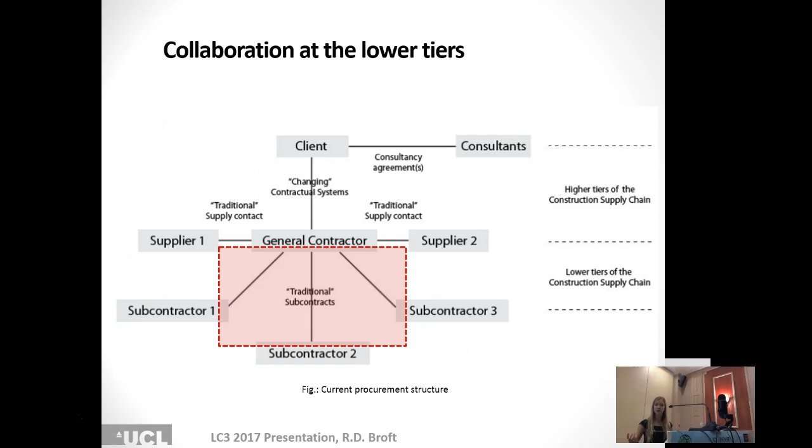You get the answer often, well, it's because of the characteristics of construction. It's because of the fact that there's converging logistics to a common and fixed point. It's because it's temporary and non-repetitive. There's always a change in the parties on site. You have multiple and concurrent projects at the same time to manage. It's engineered to order, and you have two types of processes, batch processes and job processes. And these characteristics are seen as peculiarities. They're seen as something that prevents flow as efficient as in manufacturing.

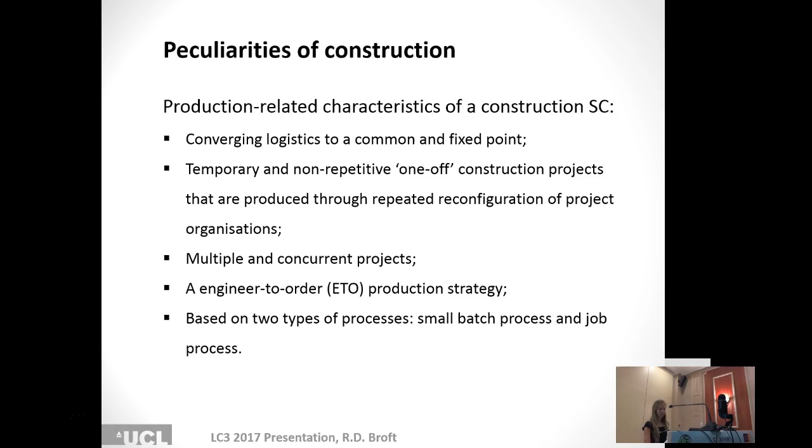And previous research that I've done with Stephen Pryke, UCL, says actually that the main contractor could use the central position. He could take the leading role in implementing supply chain management. But we showed that if he wants to do that, he needs to develop his internal activities and become more mature. He needs to help suppliers to become more mature, and he needs to facilitate value creation on-site and off-site.

This paper shows the journey of one step. Just one step to become supply chain mature. So what could you do as a main contractor to become and to help? It describes the advantages and effects of implementing value stream thinking and flow to construction supply chain. And it shows what is the effect on collaboration and what is the effect on the activities. That step is like a production system design. How could you organize your project? What could you do, etc.

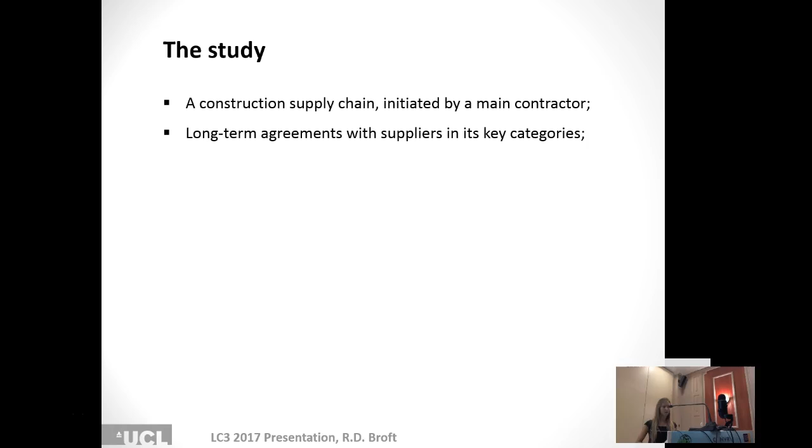It's an experiment. So what do we have? We have a study that involves a construction supply chain initiated by a main contractor. So a main contractor says, okay, I'm going to build long-term agreements with suppliers in key categories. So he has one collaboration with every category, etc. The supply chain is based in the Netherlands. He has one focus: he focuses on one value stream and designs it for that value stream. In this case, basiswonen, which is Dutch for housing.

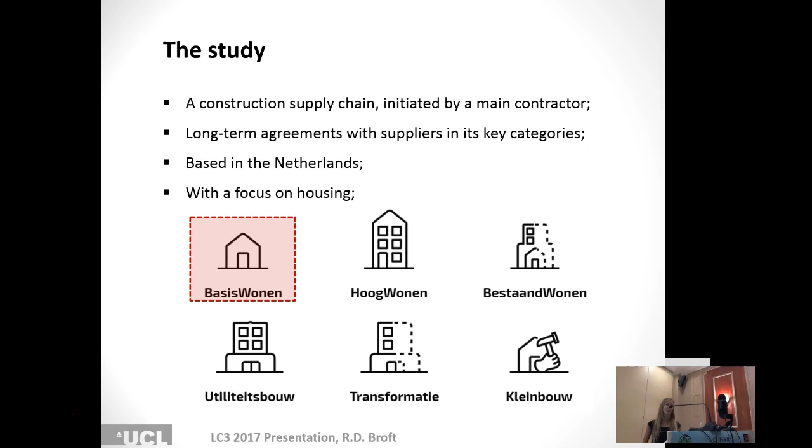We chose a project of 40 houses. So one project, 40 houses, and we conducted an experiment. And within this project, therefore, we have two cases. One case done as an experiment, and one case as a traditional. And the case involves more houses. So one part has been done as the experiment, and one part has been done the traditional way.

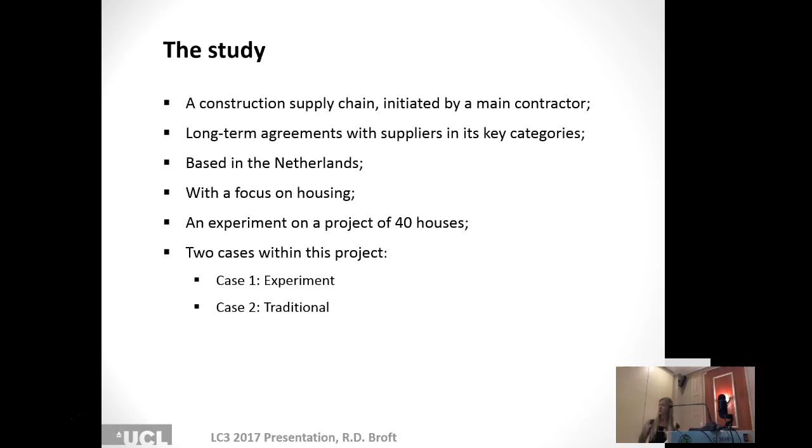This is just for you an illustration of the object. So this is the product they had to execute. So you have to imagine that while doing the experiment and while doing the traditional building, there were semi-structured interviews on all levels. So the director levels, project leader levels, and the people actually on site. There were also multi-moment analysis, so you have to imagine that every minute of the execution there has been measured

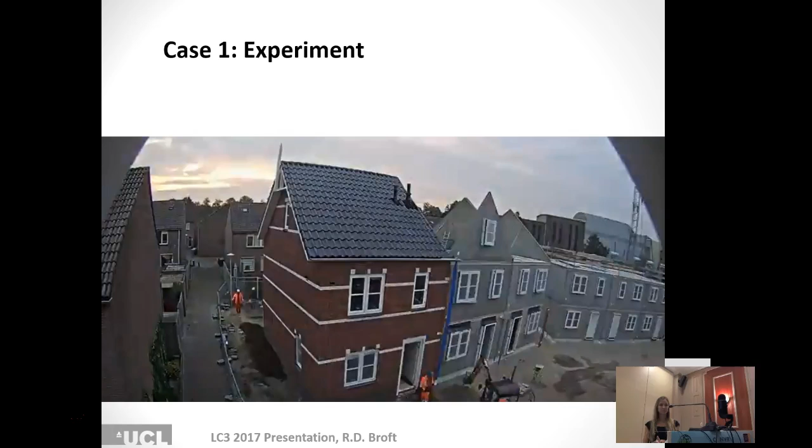what has been happening. And if you put that into a table, and this is just a summary, but this gives an overview of what has happened in case 1 and what has happened in case 2. And this is just general for a discipline, but we have this information also on every activity that has been done by a contractor or by a subcontractor. So for example, if you see production of foundations, then it's not only foundations as a total, but also all the sub-activities have this information.

What is the lead time and what is the value waste ratio? How many employees were involved? What time did they start? What time did they finish, etc. In this table you can see, and that's the most important information, that when you do it with case 1 as an experiment, it's continuous flow. So no single moment that the product is waiting. At the moment that one activity finishes, the next one continues. And that means that the product is finished in 20 days.

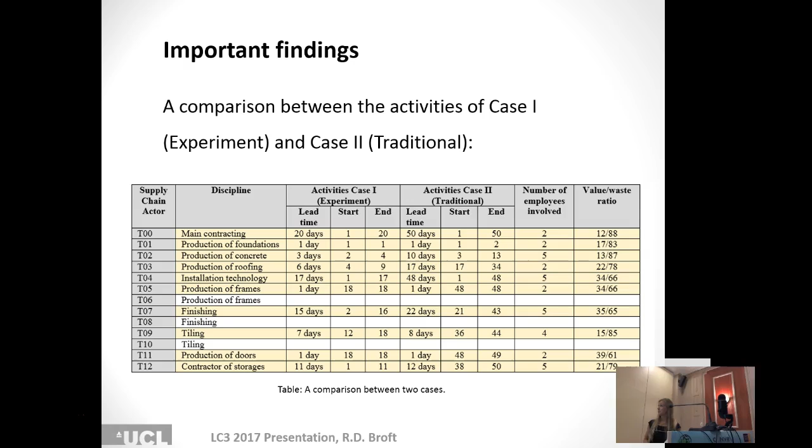The other case, traditional, has the batch thinking in it. If you execute it that way, it's 50 days. So that's the biggest difference in lead time of delivery of one project. Value waste ratios are written then. Value adding activities within the activities of the supply chain members remain the same. So there's not more value added in one case over the other case. Within the activities, the ratio is the same, but of course there's a lot more waste in the traditional case because the product is waiting in between the activities of the different parties.

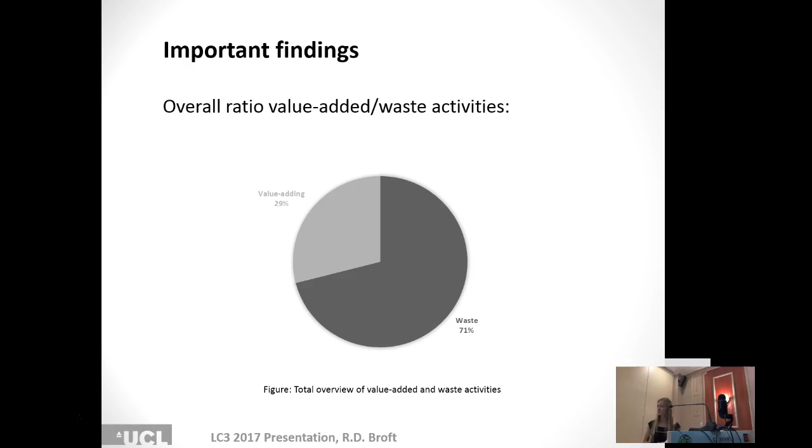There's also information about dependency. We asked them and explored who are you dependent on? What other trades, etc. So that's column 1 saying that person is on a critical path, so he cannot continue with the project unless the other member is finished. It gives the original batch. How would you build it normally? It explores all the barriers, etc., and the biggest type of waste.

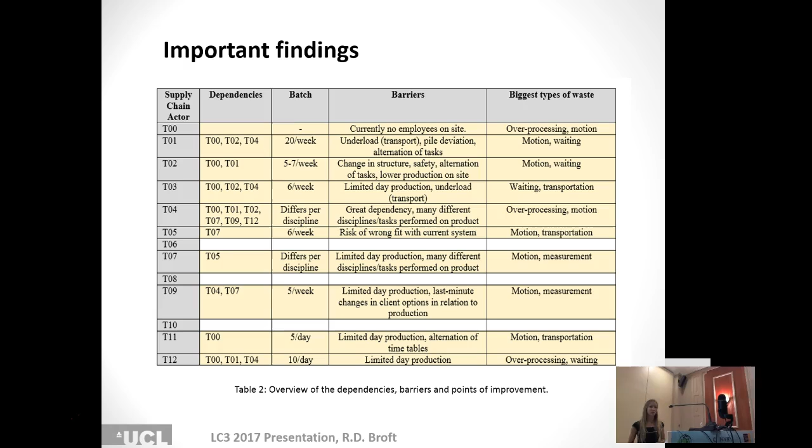Conclusions, if you look at this information, is of course you have extensive information about all the processes. You could use it as a supply chain member, so how can I improve my own processes, because you know everything about waste and value ratios. But you can also use it as a supply chain. Where are the gaps, where can we improve? It also gives, besides the team building, because you're dependent, you find out who you are actually dependent on, who's your critical path. And by focusing on one product, you get what Lean says, the learning loop. You continue to the next one, and you have your learning.

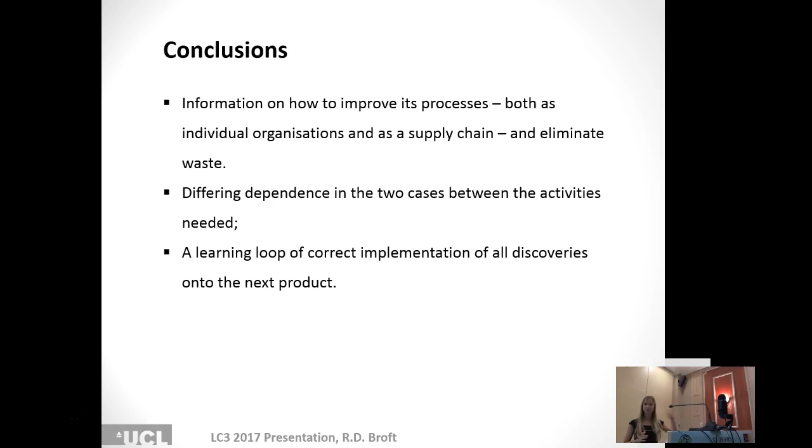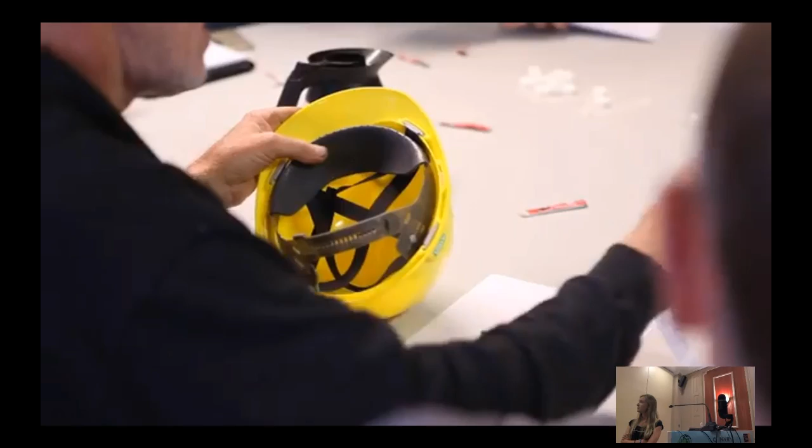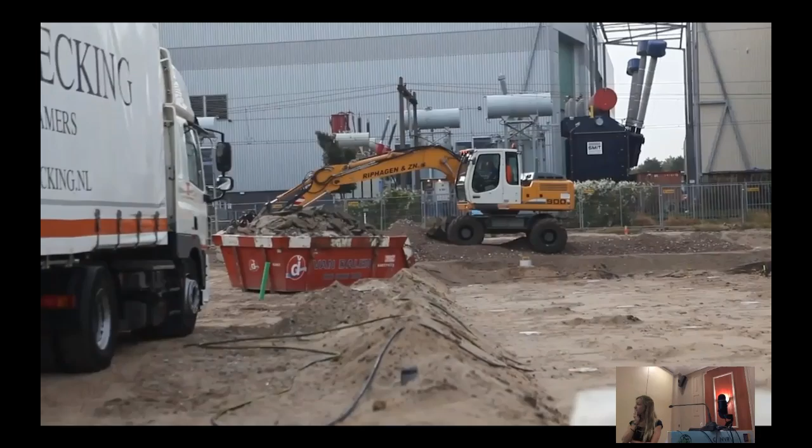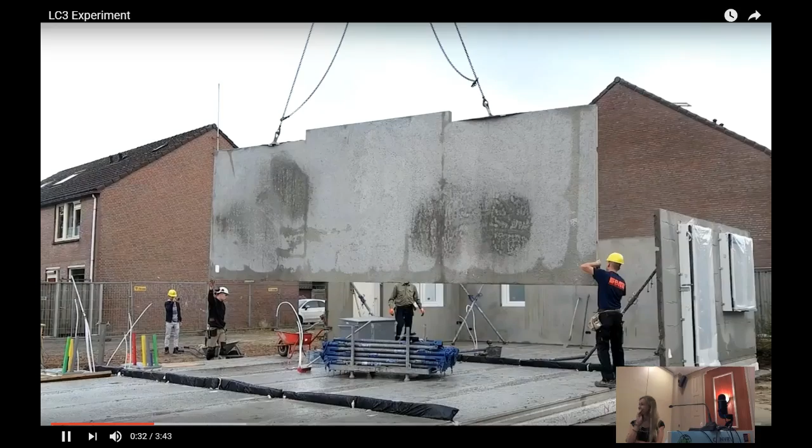So I would say it's time for more experiments, because you get a lot of information. And I have one movie that just gives an image of what has happened. You could skip at a certain point when it's too long.

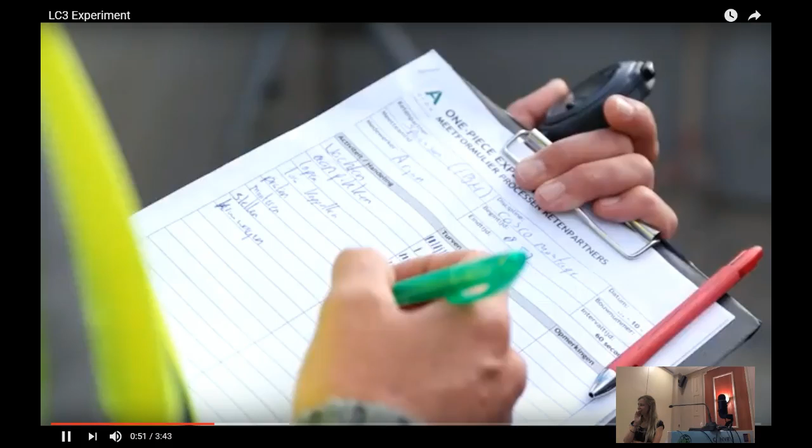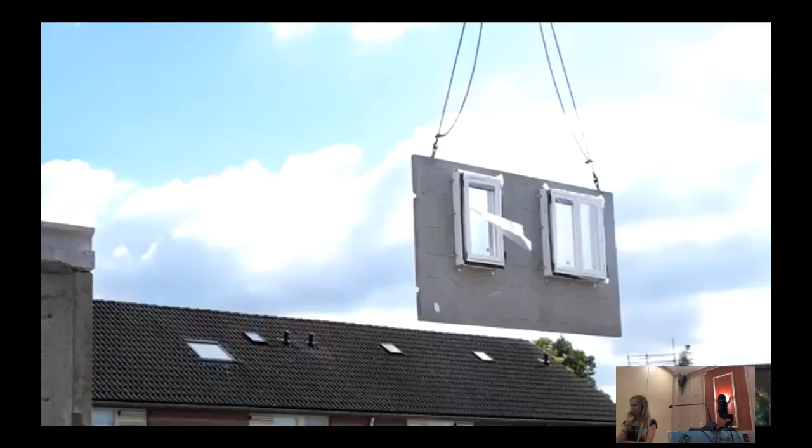The same experiment is going to be conducted in half a year also in hospitals, in parking garages, different housing projects and apartments. So it's going to give us a lot more information about different types of value streams.

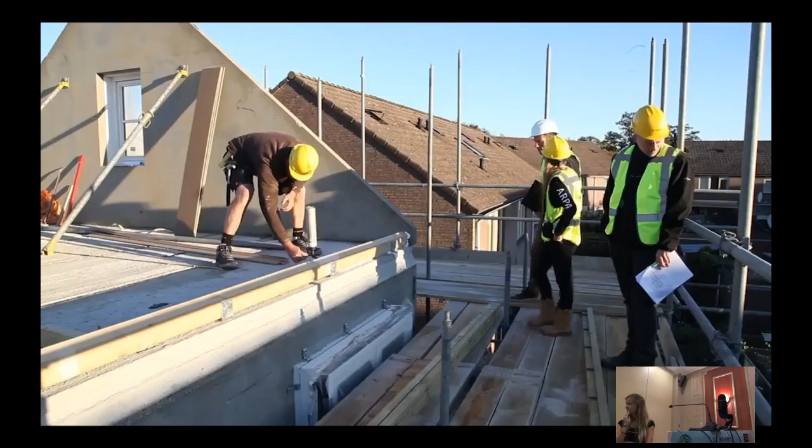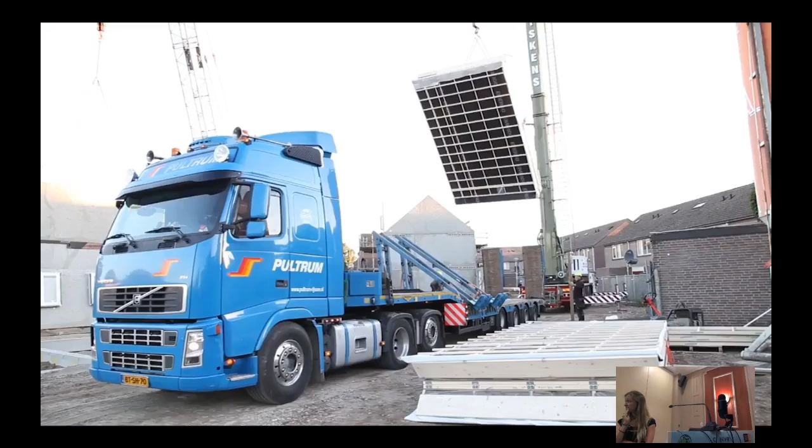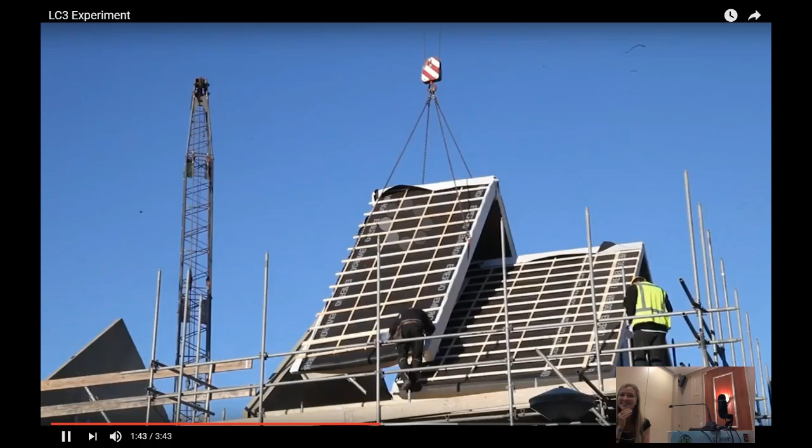There's two options. Either I put it on the background, or we skip to the time lapse. What is? Time for questions now. No. So we just put it on the background.

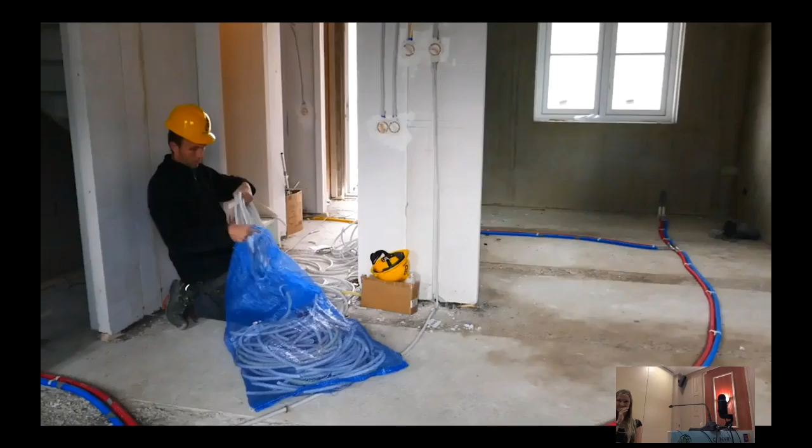So, questions? Question, Martin Maritiki from Sydney, Australia. How did you collect your data? Because really, for doing these sorts of experiments,